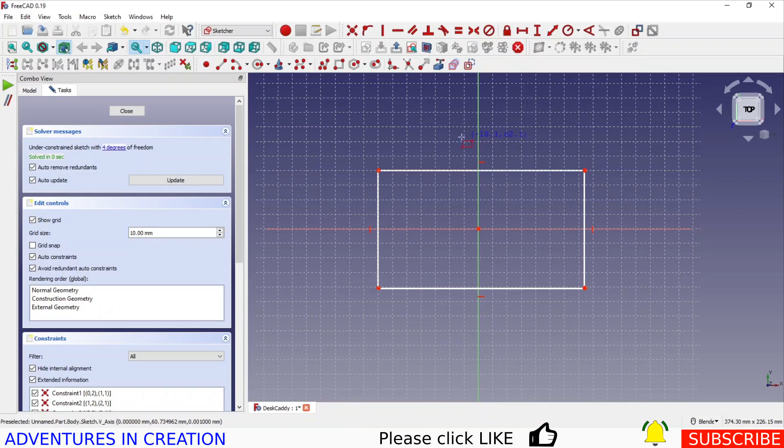So I know the base of it is just going to look like this. It's going to have a couple of holes, dowel holes in it, just to line everything up. And there are going to be some radii in the corners, just to give it some shape.

So this would be the base, and it isn't going to have any holes in it, of course, other than these dowel holes. So that's about the size of it.

And I'm going to constrain it quickly. I am going to use this point and this point to my center, just make that symmetrical. I know that these radii need to be 20.

And I know that this, and this, are all going to be equal.

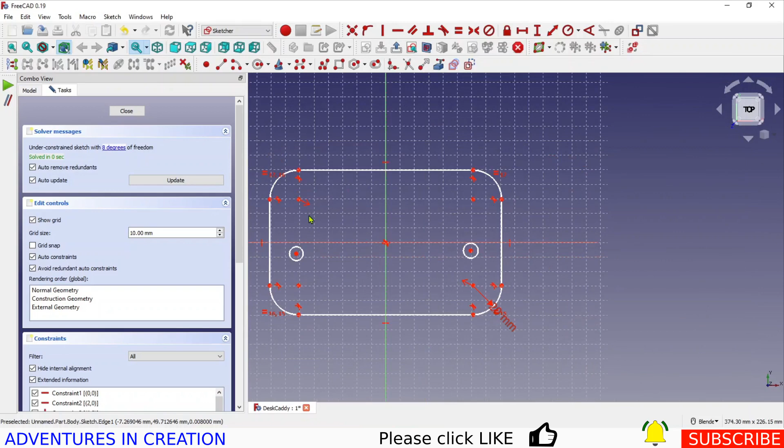And then finally my dimensions, I'm going to dimension this guy across here. He's going to be 230 millimeters.

And I'm going to dimension this way, and he's going to be 130 millimeters.

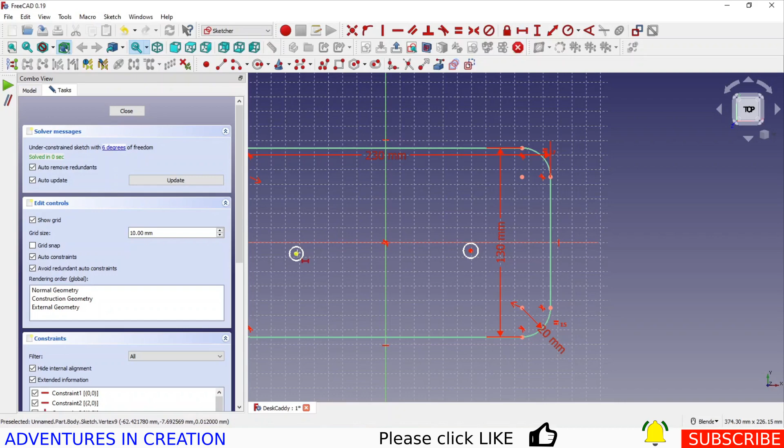And then I know I actually already figured out that these holes are going to be 220 millimeters on centers. And of course, they're going to be symmetrical around this line.

And I already figured out that the height of them needs to be 7 millimeters from the center.

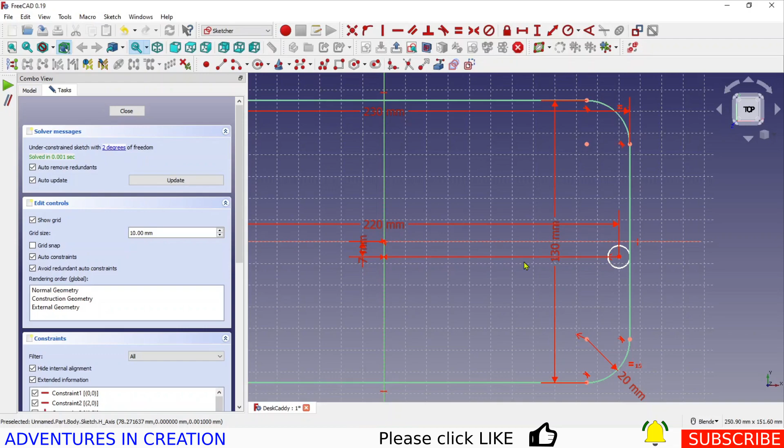And the diameter needs to be 6.4. That's the size of my dowel pins.

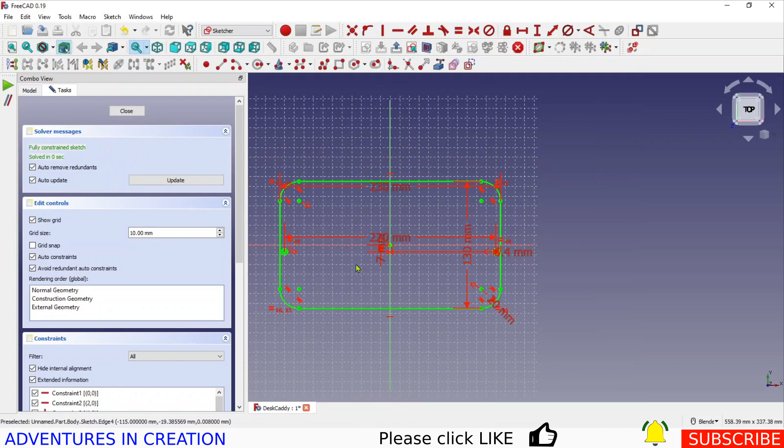And this one and this one are going to be equal. And that's basically it. So if I close that and pad it, all my pads are going to be 4 millimeters thick.

Because that's how thick my plywood is. And just bring that to the center. And there you can see the base shape.

And it's that simple. Okay, the next part, and I'm actually going to create a new part. So because I'm going to CNC route it, you want to have them separate parts so you can put the jobs in those parts. So I'm going to create a new part with a new body.

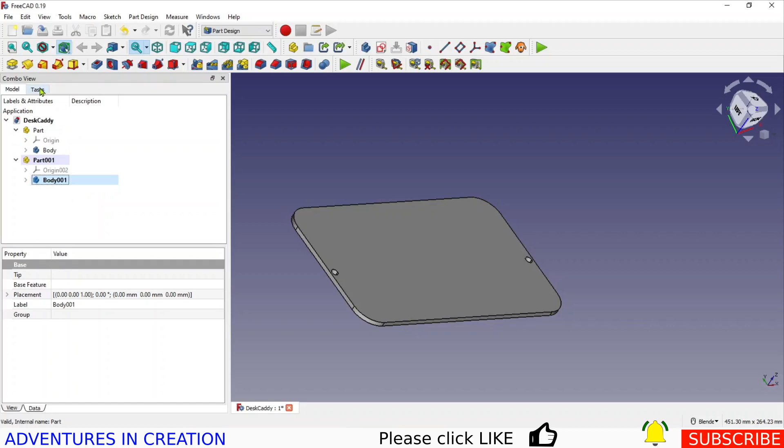And I'm going to make this the active body, and create a sketch. Apparently I didn't make it the active body. Now it's the active body. Create a sketch, XY plane.

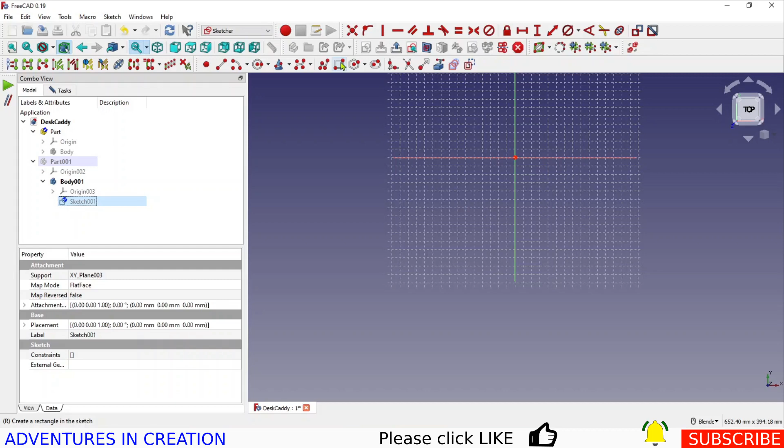And it's going to be the same outside shape as this. So I'm actually going to turn that off for a minute. Back to the sketch, we're just basically going to sketch the same outside shape.

So I'm not taking the time to show you all the details on this outside shape. I'm just going to put in my radii between there, there, there, and there. So if you want to see more details on just the sketching part, look at some of my other videos. Again, this video is going to concentrate more on creating the paths.

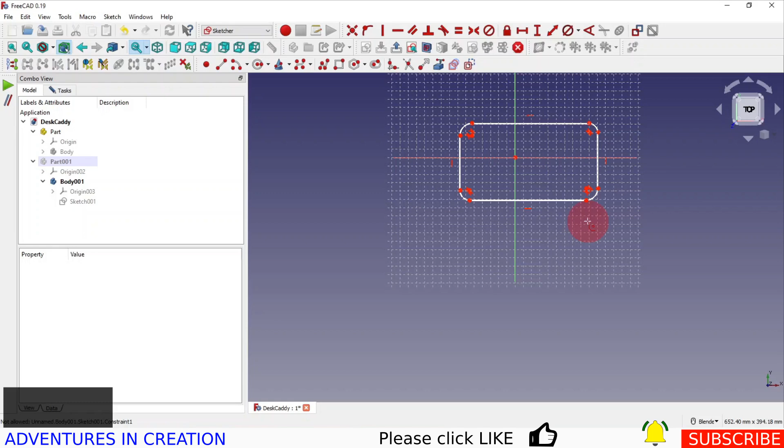I will create an assembly. I'm going to show you what it looks like in assembly. So we'll do some Assembly4 on here just quick, just to show you how that works.

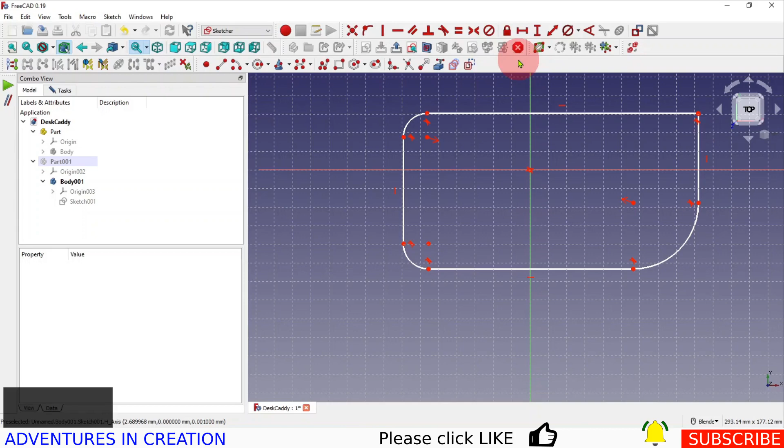So as far as constraining, I'm going to do the same thing. I'm going to constrain this point and this point around this point, and I'm going to just dimension those radii.

We know they were 20. There we go. So we're going to go that guy, and that guy, so they're all equal.

And we're going to put our holes in here. It doesn't matter where you put them as long as you don't put them directly on this line, because it will create a constraint and lock them to that line. You don't want to do that.

So we know that the dimension from there to there is 7 mil, just the same as we did. So those are our alignment holes. So it's important that they're in the same place, because that's going to line everything up.

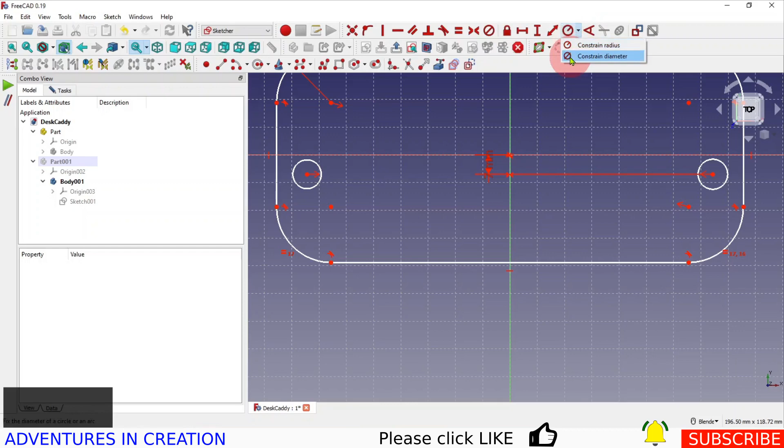And we know that's a symmetrical constraint. We know dimensionally we want those to be 6.4, so the dowel should go in there fairly easily.

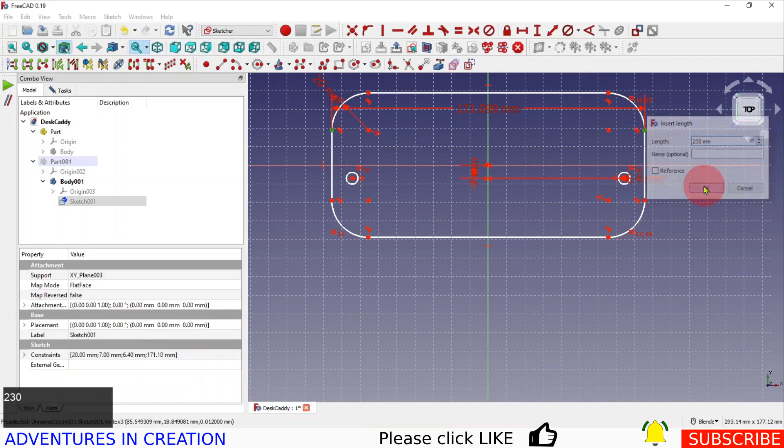We're going to make those equal. So that's that part, and the outside dimension for that we know is 230, and the outside dimension for that we know is 130.

And we also know this dimension between these two holes is 220.

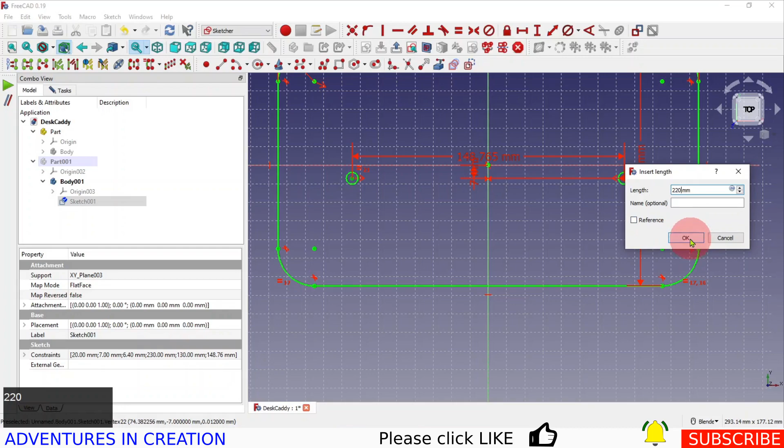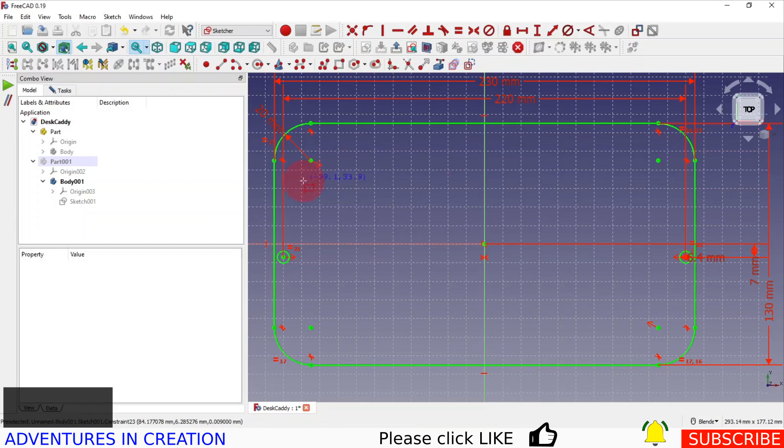Now it's just the cutouts that we want to put in. I'm just going to move some of these dimensions out of the way. We want to make the cutout for pieces to sit in the actual tray that's going to hold all the parts. So what I want is a square or a rectangle that goes in here, and a smaller rectangle that goes in here.

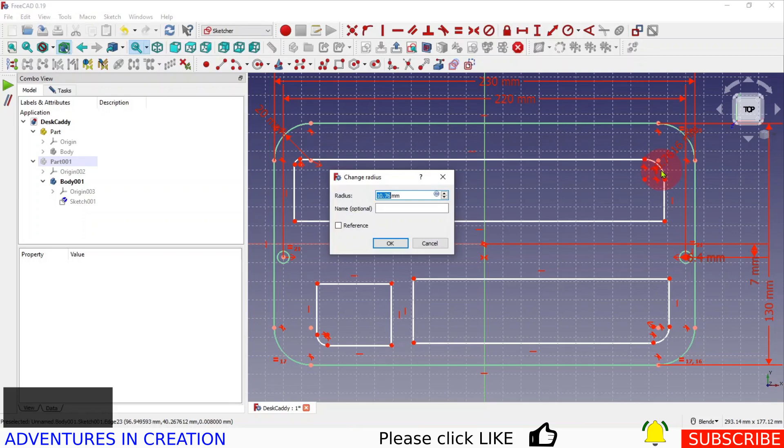I'm just being careful not to actually place it on any point so it doesn't constrain onto those points. Then what I'm going to do is add some radii up here, down here, down here. I'm going to constrain those radii to be 8, and make that one, and that one, and that one, and that one all equal.

Then I know I want this, and I'm going to leave these as square corners. Of course, we're going to cut them with a round cutter, so they will have a slight radius on them, but I'm not going to show that. It's not necessary. So I'm going to make this guy

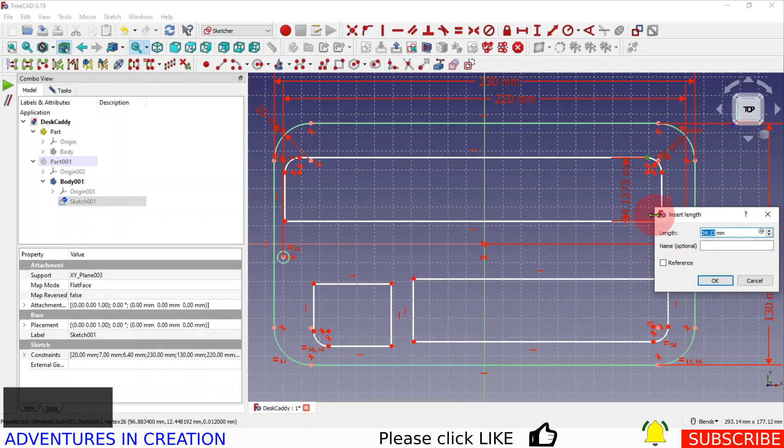60. So that's how big I want that. And I want the outside dimension for that to be 220.

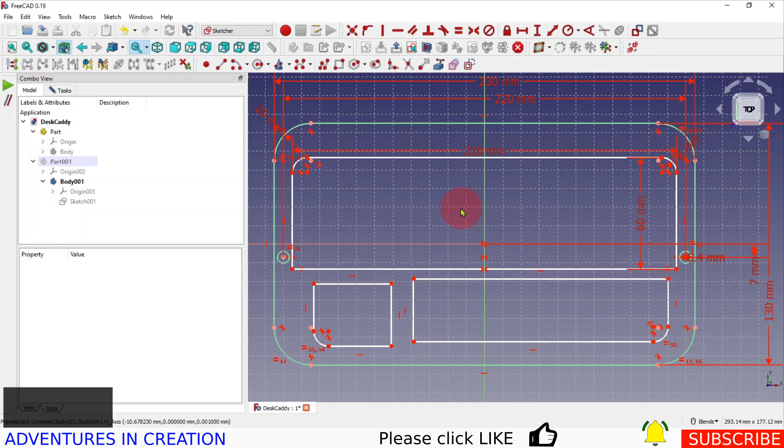And I want that guy to be symmetrical in the middle. So I'm going to go with this point, this point. I still have the dimension line on. This point, and this guy, and say symmetrical. Sometimes with the red dot on there, I can't see that the dimension is still showing up on my cursor, so I forget to right click it, so that's why I just had to redo that.

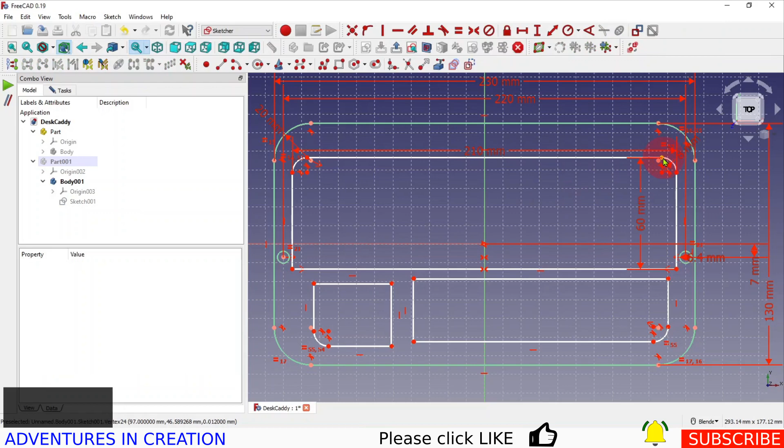What we're going to do then is we are going to position this. We want it to be positioned so that the dimension between that line and that line, that's actually the wrong one, hold on, that one and that one is 10. So I'll pull it up, and that's where we want it to sit.

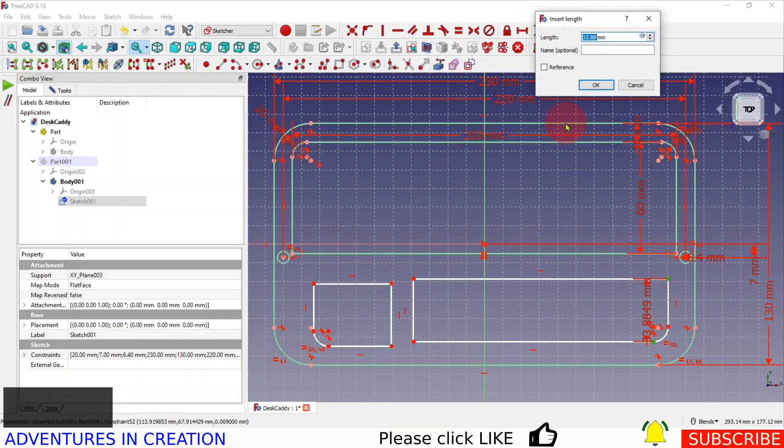And then for this guy, we're going to dimension him. He's going to be 56. That's good. And just look in to make sure I got my dimensions right.

Oh, I want to align this guy and this guy. So I'll just hit those with a vertical alignment. And I'm going to align this one and this one with a vertical alignment. And I'm going to make a gap between this one and this one. I'm going to make that gap 8. And I am going to align this one and this one horizontally. I'm actually going to dimension that gap between them because I want there to be a gap between them.

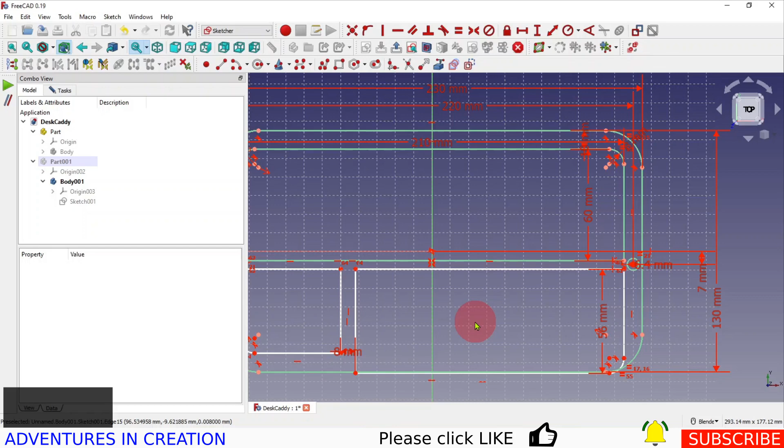I'm just looking at my sketch, and I think I may have one of the dimensions here set up incorrectly. I think that 10 dimension. Let's see if we can find that guy. There he is there. I can pull him out here. I think he should only be 8. There we go. That looks better.

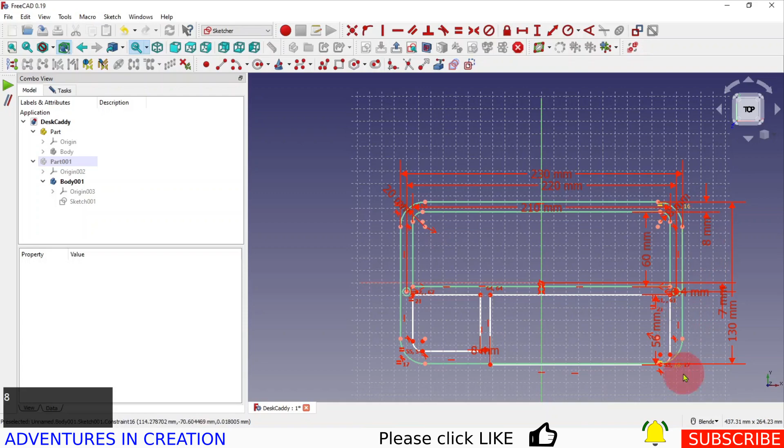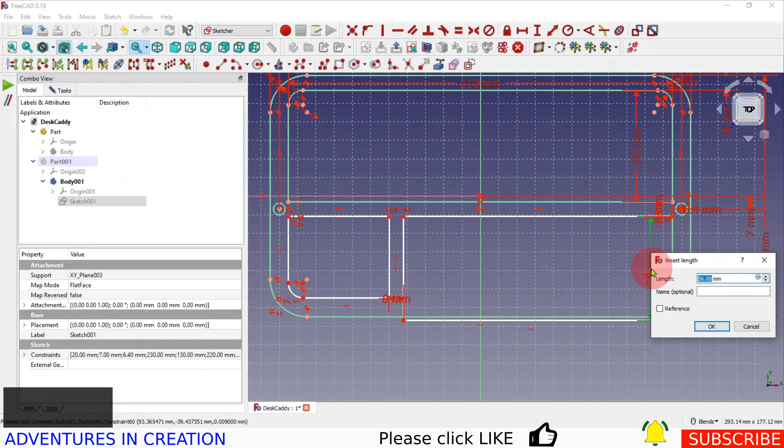And I think my 56 dimension might be miscalculated too. We want to go from here to here. I'm going to go with that as 8. Just going to push that down, and then what I actually want is not for that to be 56. It should be 46 is that dimension there. Miscalculated by 10. There we go.

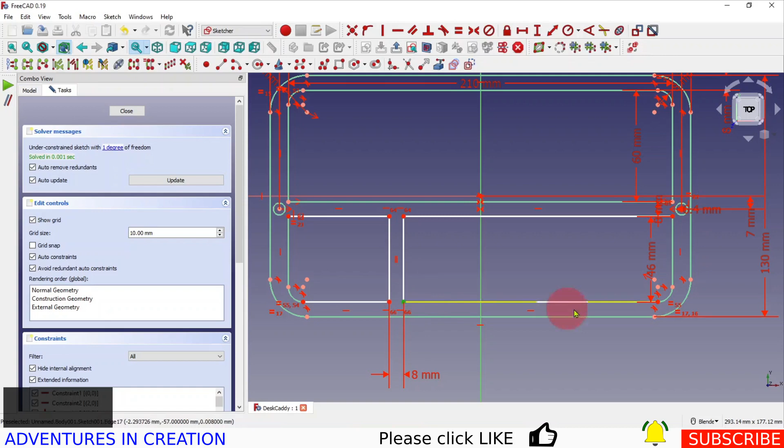And then that guy and that guy, they should be horizontal. It's about time we did a save here because we don't want to lose anything. And what else do we need to dimension? This one, this one, and this one.

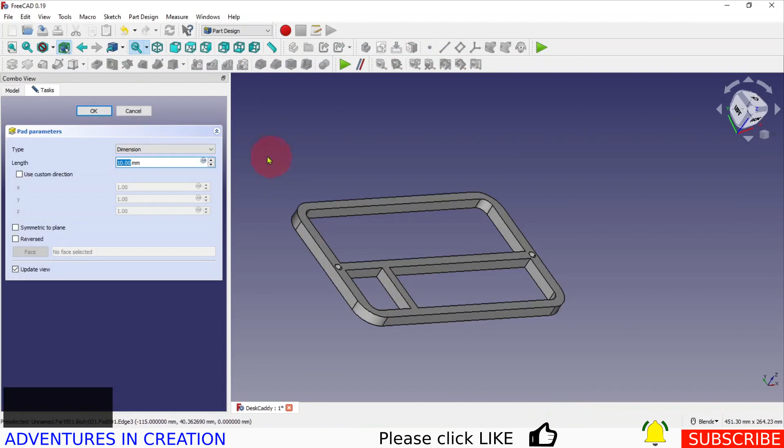We're going to dimension that, and it's going to be 160. There. And that is my tray. So I'm going to close that. So we're going to pad this one 4 millimeters, the same.

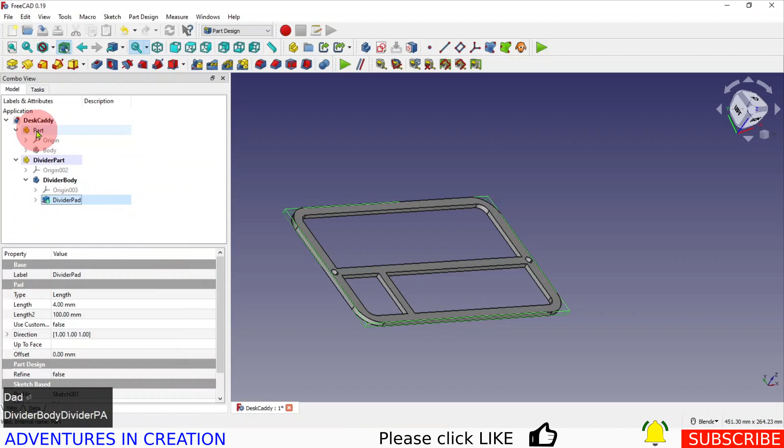And then we're going to go back to our tree. And now we're just going to give these some descriptive names. So I'm just going to rename that. I'm going to call it my divider part, my divider body. You can call them whatever you want, doesn't matter. And I'm going to call this my divider pad. I generally leave the pad body part pieces in the names, just so you make sure you know what's what.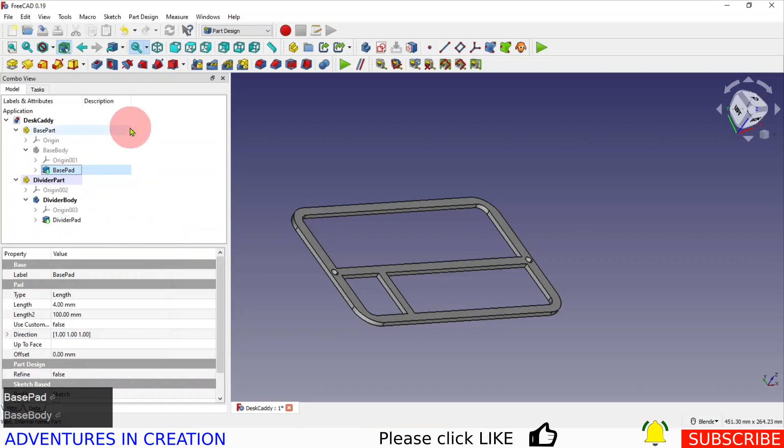And this one I'm going to call my base part. And this one I'm going to call my base body. And finally, I'm going to call this my base pad. Okay, and so that is my two parts.

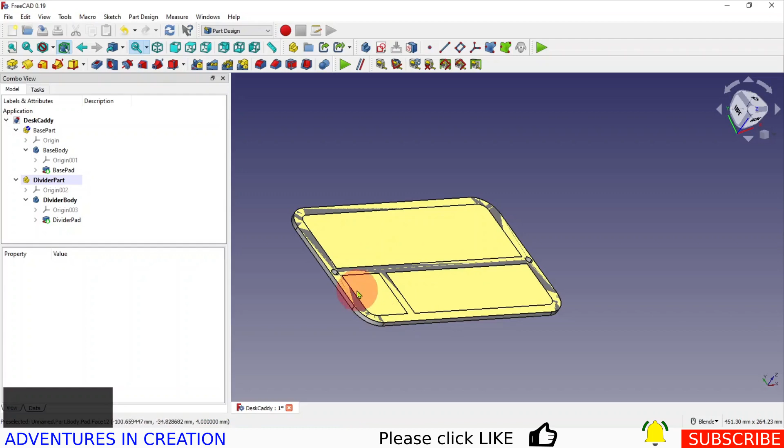And I'm going to use these two parts. I'm going to create multiples of them. So I think from what I've seen so far, I'm just going to create one base. And then I'm going to create 7 of these dividers. And what we're going to do now is we are going to close this guy up here. And we're going to save it. And then we're going to create a new assembly just so that we can see what it looks like.

So we're going to go into Assembly4 quickly. In Assembly4, we have the Desk Caddy assembly and the Desk Caddy basic models. And what we're going to do is we're going to apply some LCSs to these guys. So we're going to add an LCS. We're going to call this LCS front.

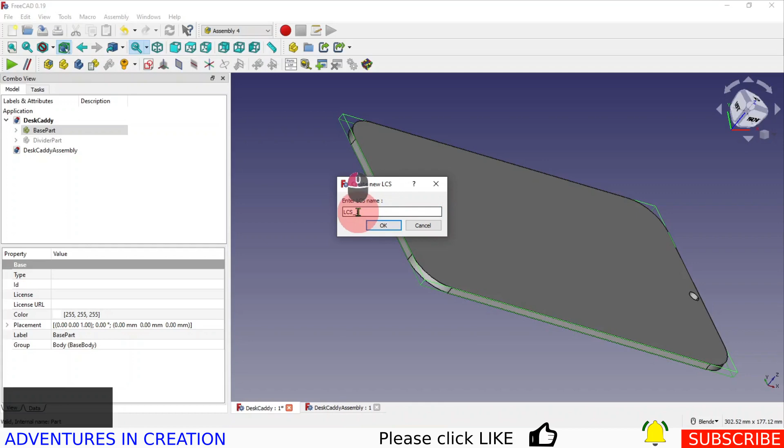And we're just going to put it on this hole here. These are our alignment holes, so we want to put it on the hole. Say it's concentric—it's important that you click that concentric. You'll see the LCS is right there.

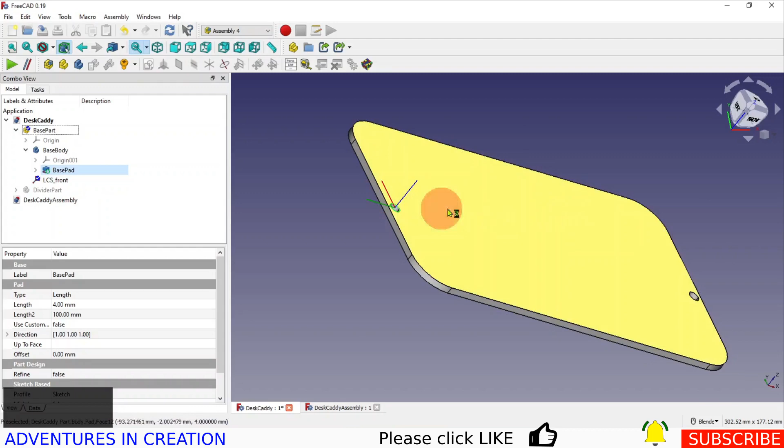Apply, say OK, and now we have the front part of this base. And we're only going to have one base, so we only need one LCS for that. So close that, turn that off, turn the divider part on. I'm going to create an LCS for that, and I'm going to call it LCS front.

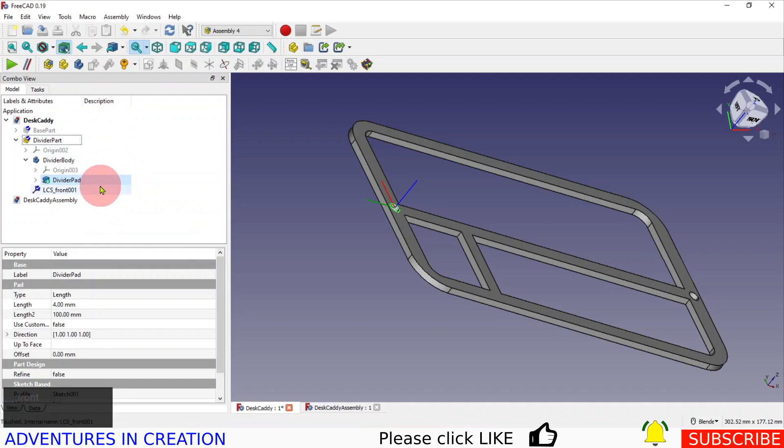I'm going to apply it to that same circle on the front edge and make it concentric. Say apply, say OK. And then we're going to do one more. So we're going to go to the part, add another one, and call this back.

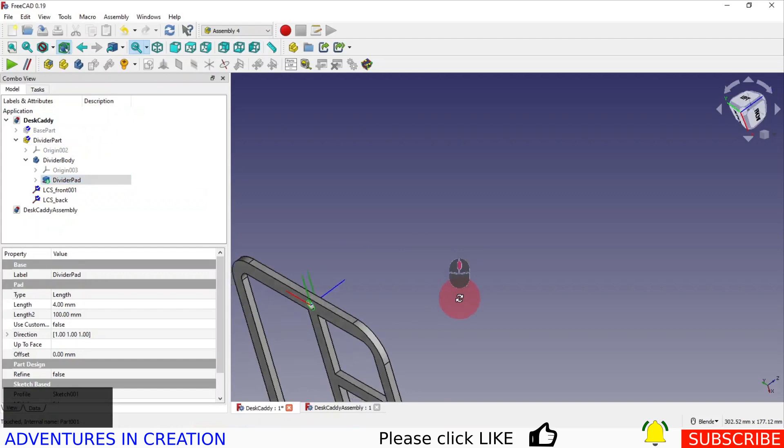Now, because we want them to stack up on top of each other, we're going to put this one on the back here. Concentric again, apply, say OK. And if you look, now we have one LCS. If I show you close up, we have one LCS sticking up there and one back here—one on the front and one on the back. So that's all we need to do for that.

We are going to turn that guy off, close that, and go into our Desk Caddy assembly. Ignore any messages, errors, whatever. I'm going to start a new model, and then I'm going to link in my models.

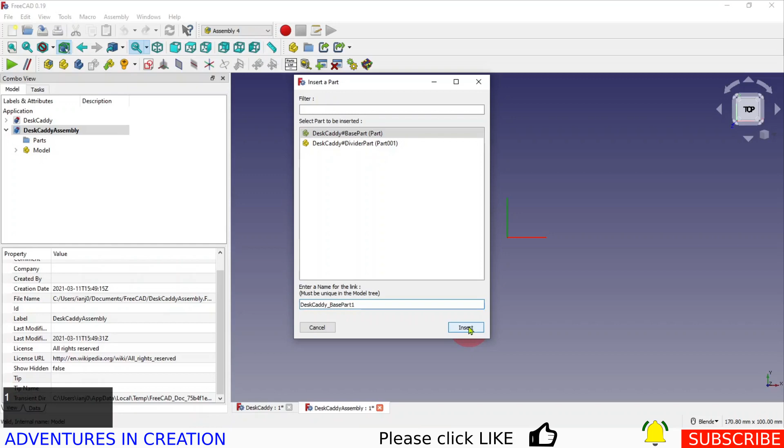So I'm going to hit link, Desk Caddy part. I'm just going to call it part 1 in case I wanted to put a second part in, but I'm just going to call it part 1. And take the front of that, put it into the parent assembly onto its origin, and just because I wanted it sideways, I'm going to rotate it through the Z as it comes in and say OK.

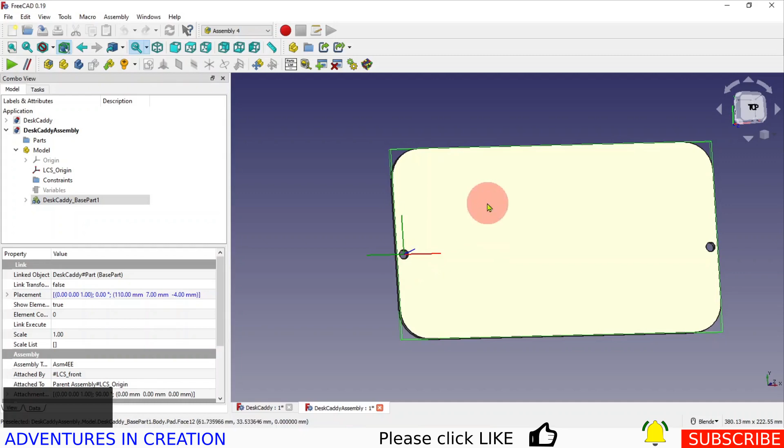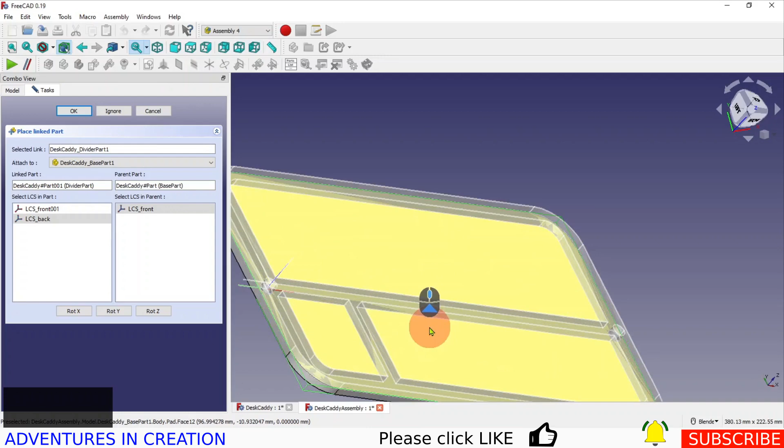So now I have in my assembly just that base, and now I want to add a divider. So we're going to go back to our assembly and link in a divider part. I'm going to call that part 1, say insert. The back of part 1 is going to go to the front of the base part. So if you look here, you'll see it's actually going to come in on top of it, and it's exactly where we want it.

And then we go here, we're going to link in another divider part. We're going to call this 2, insert. And we're going to say the back of that one is going to connect to the front of the one above it. So there, say OK, and you get the picture here.

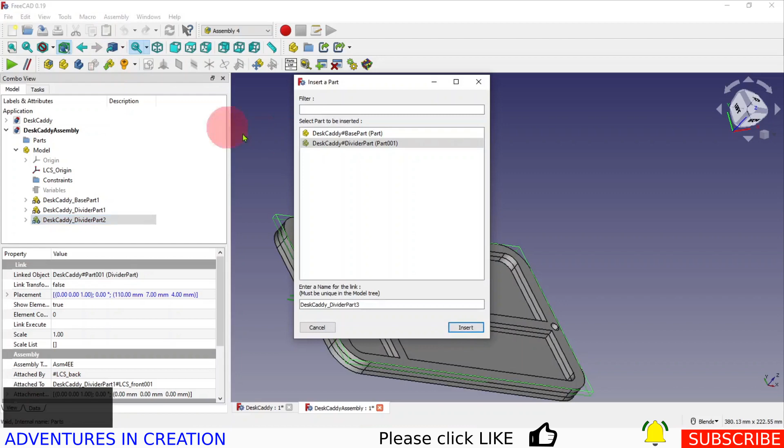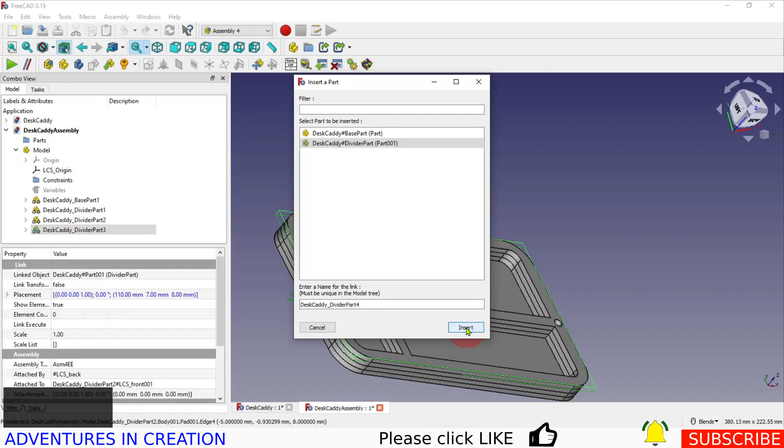We're going to just keep adding. So I'm going to add another one, call that 3, insert the back of that to the front of that, and one more. Right part, it's actually doing part 4 for me. Insert back of that, it's going to go to the front of that.

And so how many do I have? Four, so I want five. Insert, back to the front. Say okay, and then six. Insert, back to the front. Say okay. Last one, insert part 7, back to the front, and we are all good.

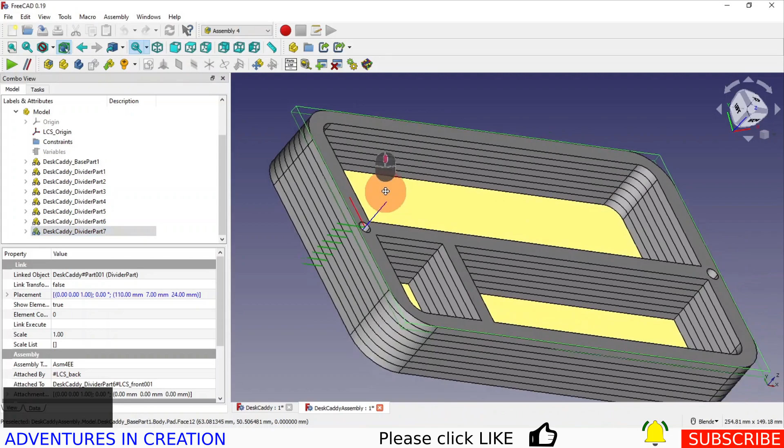And so this is what our assembly is going to look like, and we should be able to see that the holes are all perfectly lined up, all the parts are lined up. And now out of these 4mm pieces of scrap wood, I'll have a little tray that I can put my stuff in, which is basically what I'm trying to do here.

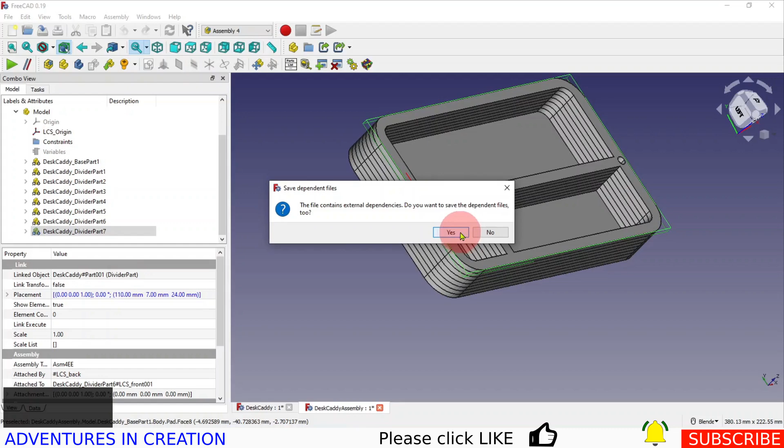So that is the assembly. Then I'm just going to save that, and I'm going to save my Desk Caddy file. Notice the way that we linked them, everything's still in this file now.

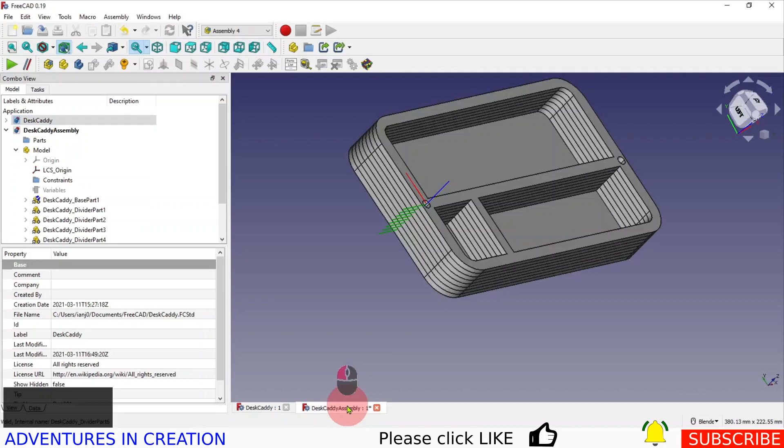So when you link them that way, everything is a link. You can see, if you look closely here, it's a link to those parts, and those parts are automatically put in the model that way. So there's our assembly, all finished. I don't need any animation because I'm not going to animate this assembly.

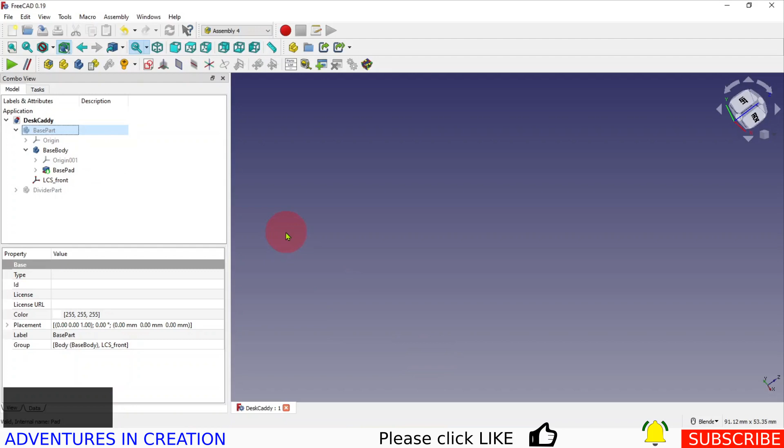Now we're going to go on and do our path work, and we're going to do that in Desk Caddy. So what I'm going to do is close my assembly, and that is all done. Now I'm going to create the path information in my original model. This should be straightforward—I'm going to do the base body first. So essentially, we're going to go into this base part and drop into our path workbench.

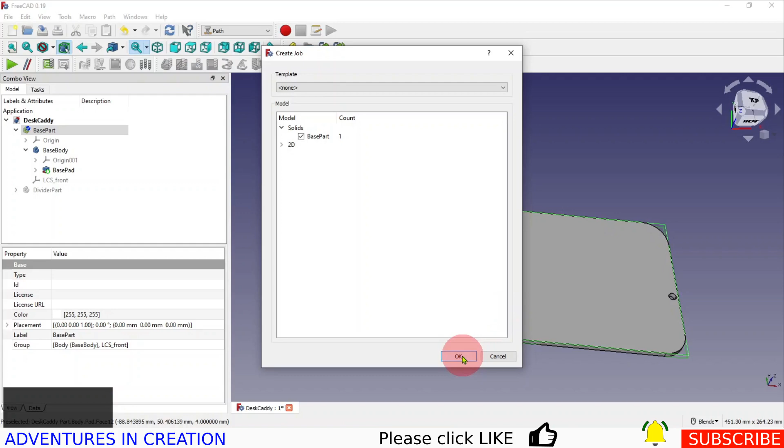We're going to create a new path, and our base part is going to be in there. We'll say okay, and let's give it a second while it sets everything up.

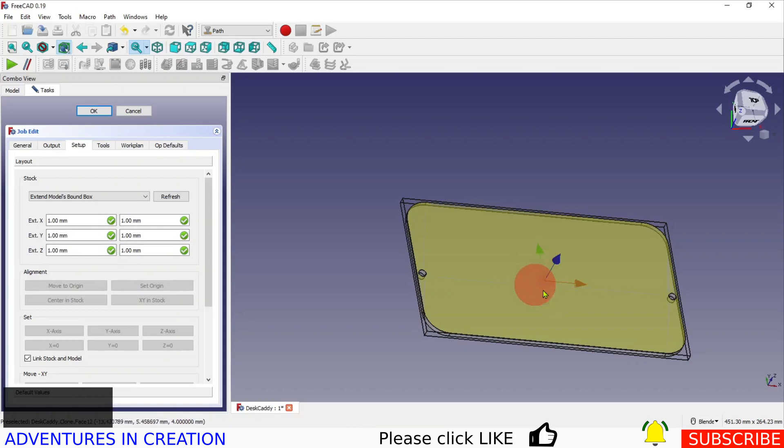There we go. I'm going to leave my LCS in the middle. So when I start my job, I'll have it in my set block here. I'm going to move to the middle of where I want this to cut out, so that's where we're going to start from. I'm not going to extend my model's bounds, so I'll make all of those 0. I don't need any complications on there.

A couple of things we can do from the start is we can add a tool. I'm just going to do all of this with a 1/4 inch milling cutter.

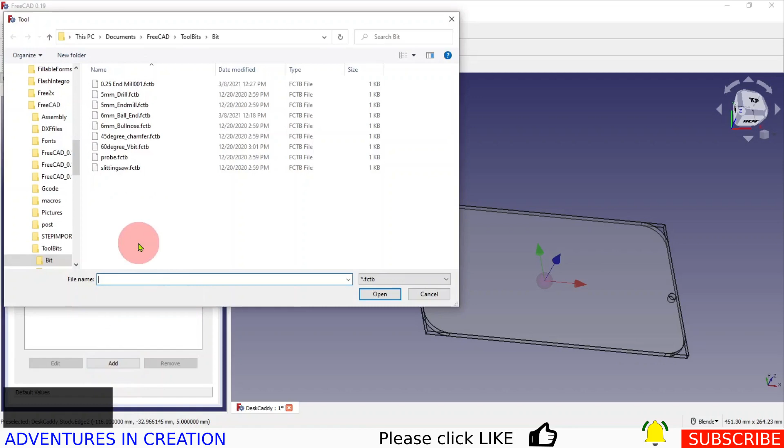So this is my 1/4 inch cutter. I'm going to get rid of the default tool so we don't have to do any selection there. And then in general, we can see it has the base part selected.

That's all good. For my output, I'm using my MPCNC post processor. That's the one I modified from the Grbl post processor to work with my particular router. It works with the Marlin board, and that's what we're using there.

On this guy, everything looks good. On here, we look good. On our work plan, on our defaults, everything looks good. So the only thing I want to set is my start depth. It's under the setup tab, right at the bottom, it says defaults. And I'm going to set my start depth to be 0.

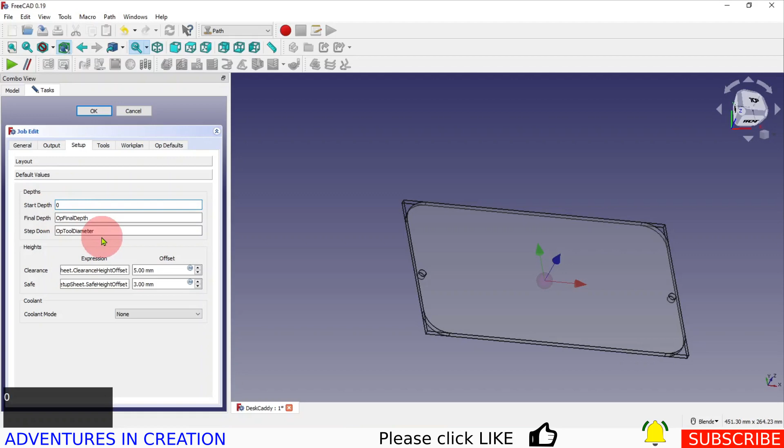My final depth is going to be -4, because that's how thick my material is. And my step down is going to be 4, because I want it to do it in one cut. My clearance and everything's good, and I don't use any coolant. So that's everything good now.

In the job, we only have our tool. We can set up an operation. So what we're going to do is select this — I'm going to use this guy up here to select the whole outside edge.

And we can cut the outside edge. It's going to be our 1/4 mill. We want it to go outside, not inside, in this case. Our heights are set at 3 and 5. Our depths are set at — the start depth is set incorrectly. It's starting at 4 and ending at 0.

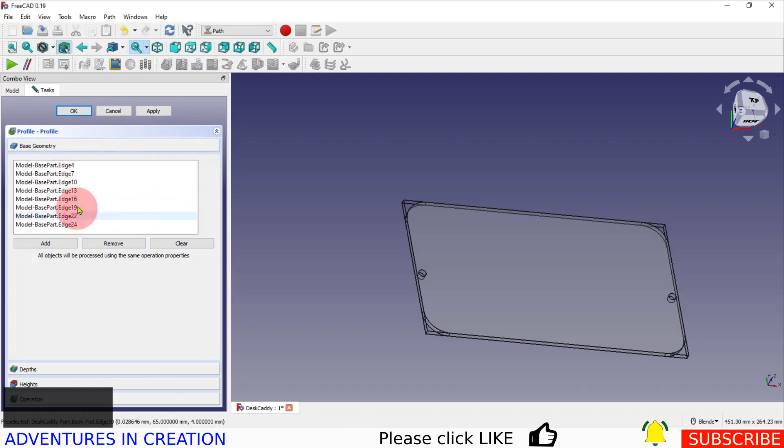Now I noticed it comes up this way, but if you just go in here and say OK, it'll go to those defaults I set, which was 0, -4, with a step down of 4. So that's all good. There's my geometry, it says the whole outside. I'm going to apply that. You can see it's actually cutting the outside, and that's all good.

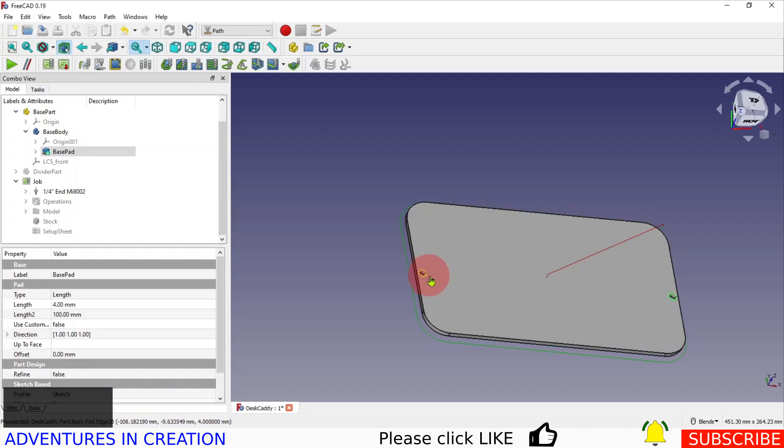Then the next part I want to do is cut this and this. Didn't get the right part there — let me just do that again. So I'm going to cut this.

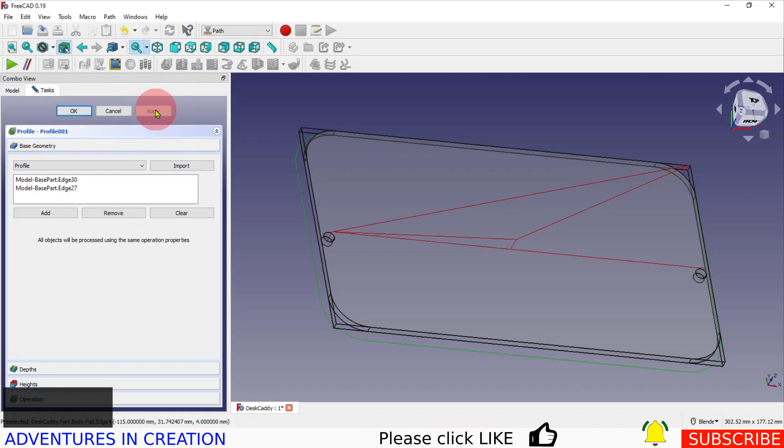And hold down Control and click that one. Now I should have them both selected. I'm going to do the same thing — it's just going to be a profile, and this time it's inside. And my heights, my depths, it can do that same trick. So I just touch this, click OK, it goes to my defaults, say Apply, and say OK.

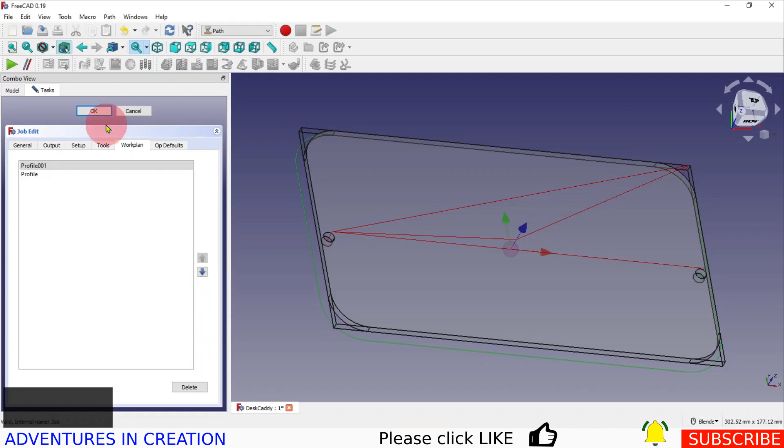Now, one thing you might notice is that in my operations, I'm doing this outside cut first, which will release that piece, and then I need to cut those holes. That's really the wrong way around. I want to switch those around, so I go into my job, into my Workplan, go to that profile 1, which is the second profile, click up, say OK, and now it's going to do these holes first, and then it'll do this outside edge.

So on the outside edge, I also want to add the tag dress up, and there are the tags — there are 4 of them. I think the default is fine, but you can have more if you want. You can add more, you can add less, individually turn them on and off, and change the width. I'm going to do a 3 mil tab, 1.5 millimeter high.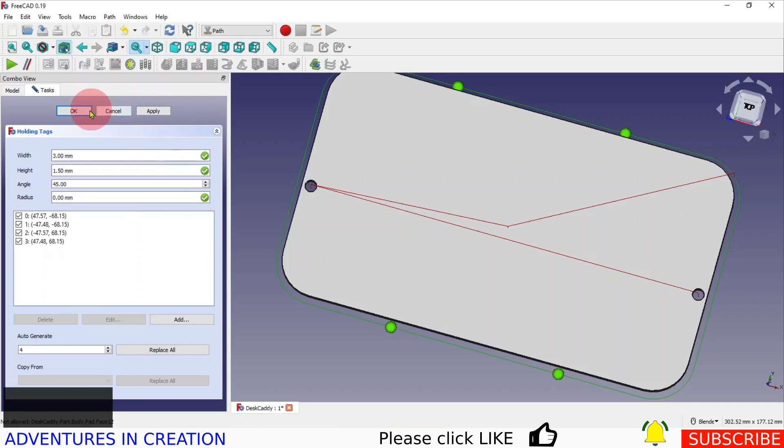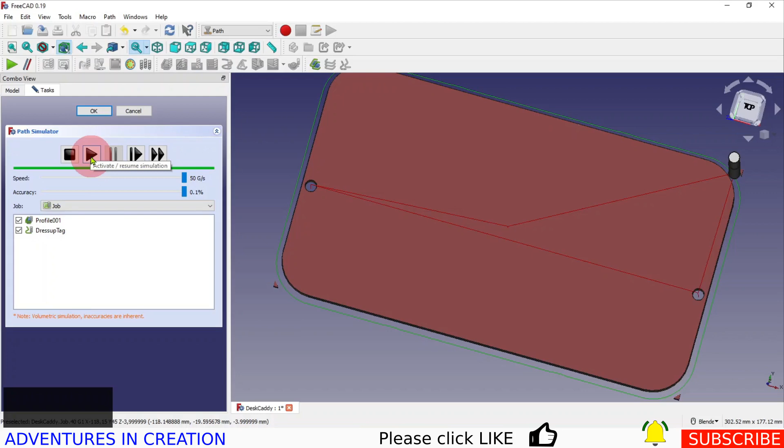That looks like it'll work perfectly fine for this part. I'm going to save it before I do this, but I can do a simulation of this part and run it. You should see it go make the holes, then go do the outside, and it's done. It's going to be in one cut because it's only 4 millimeters deep, and it's a 6.3 millimeter cutter, so we should have no problem cutting that in one go. So that's essentially the bottom part.

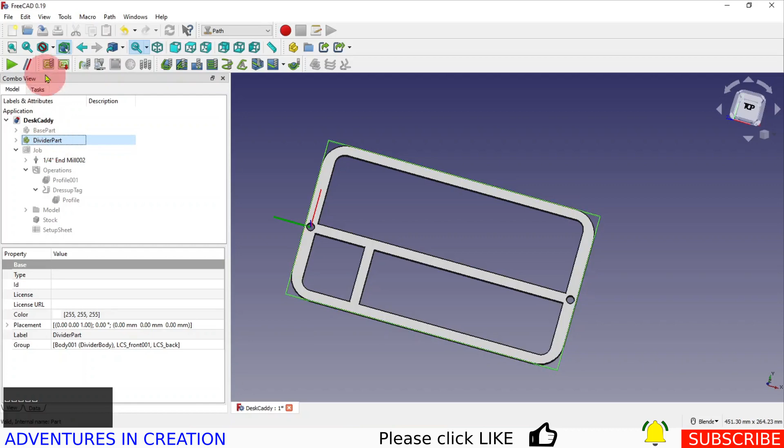Now I'm going to turn off that part. I'm going to turn off this job, turn off everything I can, so I make a nice clean go of it. And I'm going to turn on my divider part, and we are going to select that divider part and create a new job. You see it only has the divider part in it.

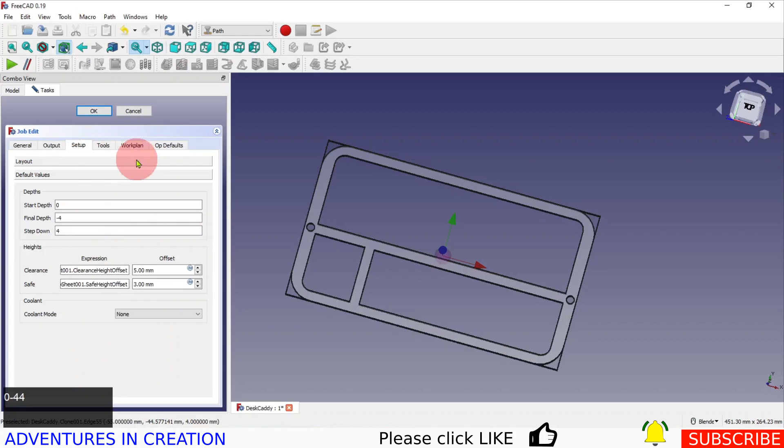We say OK, and once again I'm not going to add any extra material. I'm going to change up my tool, get rid of the default tool, and go to my setup, my defaults. It's hard to see there because I have this gray box in the way, but there's a default values button here. So I click that, and I'm going to make that 0, -4, and 4. Everything else looks great. It's okay.

And then we are in job 1, so we're going to open that guy, and here we go. We're going to add an operation. That one works. So I'm going to actually rename these guys. I'm going to call this holes, and I'm going to rename this one to large cut.

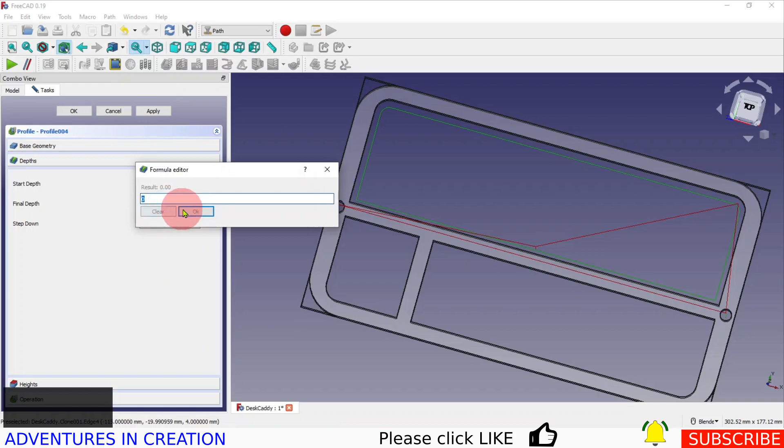I'm going to select this one, do the same thing. So I am breaking it up into smaller pieces because it gave it a headache. I don't like that. Same thing again, apply. I'm going to call this one medium cut.

Select this one, use this little guy again, hit that, job 1. I'm going to say depth. And that's all good, so I'm going to call that small cut.

And then finally we're going to select this outside edge, and job 1. Yeah, should be outside, not inside. Remember, the profile is going to be the outside. All these are the inside. The profile is the outside. So we just want to make sure we're cutting on the outside. And we'll rename that to outside cut.

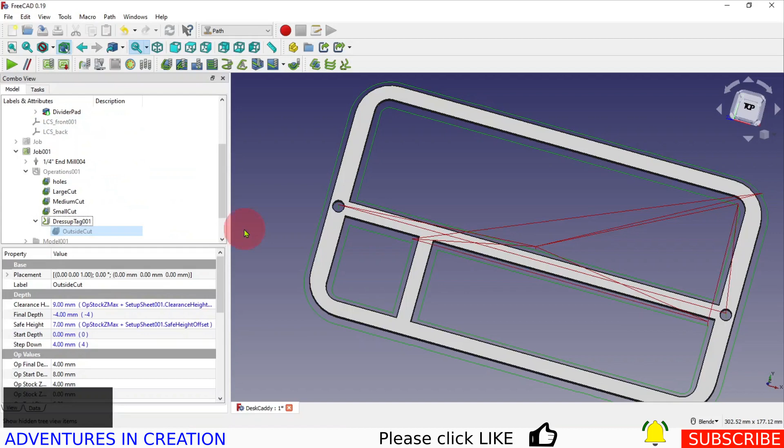That's all good, and the reason I renamed these is so I can tell which one I'm doing what with. So I'm going to select the outside cut. I'm going to put that same tag dress up on it. Looks good as well. Apply that, say OK. And now we have the cutout for these. So I'm just going to do one, then put another one in, put another one in, and do it 7 times, and then I'll have all my pieces.

So that is basically all the work we need to do to create our jobs. And then what we want to do is export those. So we're going to take job 1 out. Actually, let me just cancel that a second. I want to make sure I'm doing the right job that I'm putting out. So we're going to do job 1.

Going to rename that job. Base job. And rename that, we'll call that divider job. Those 2 jobs are done.

Now we're going to output that, and I have a G-code file here, and I'm going to call this Desk Caddy base job. There we go, .gcode. Save that.

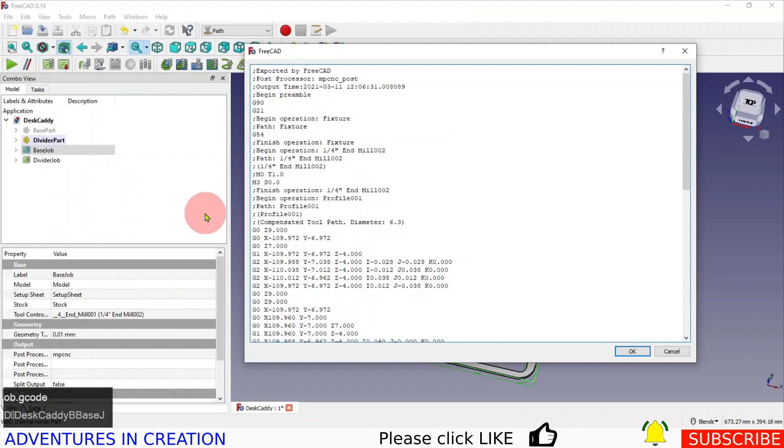Let's take a quick look. Profile 1, da da da da. And that's all it does.

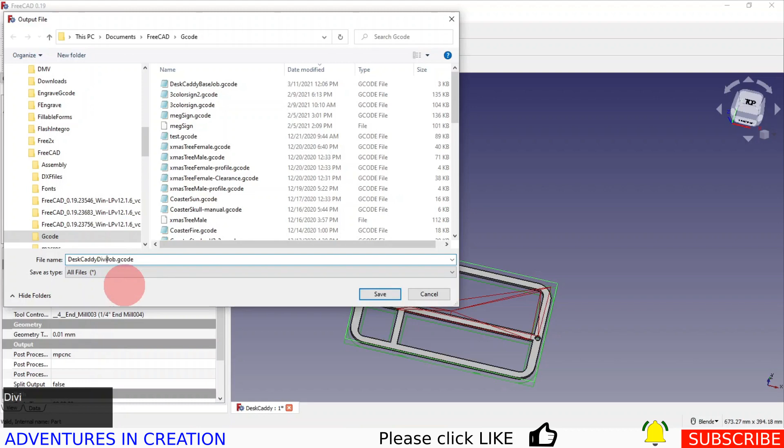That looks very good. And I'm going to take this one and output this one, and it's going to be called divider job. Save that. Let's take a quick look, make sure it makes sense.

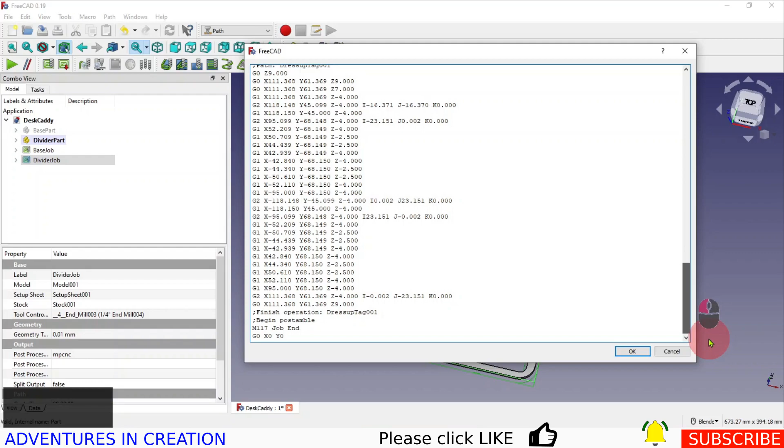So begin fixture, begin holes, and begin large cut, begin medium cut, begin small cut, and begin dress up tag. Boop. And there it is. So that all looks great.

So now I have two jobs to cut. I'm going to cut the base job and the divider job, and we'll do that on the router, and we'll catch you there.

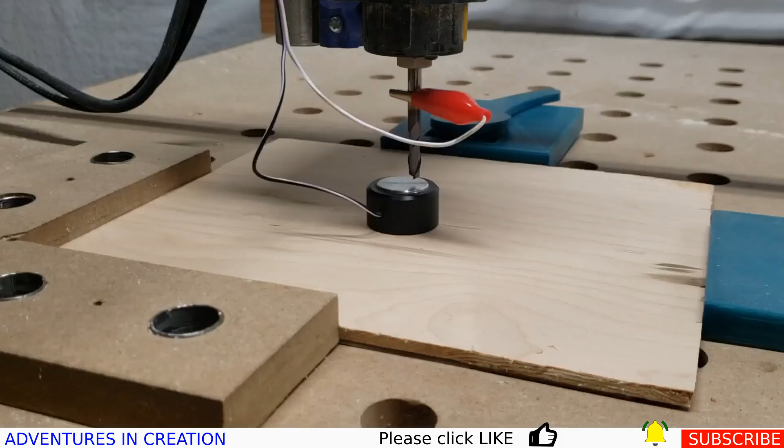So the first thing is to use my Z-stop. So what I do is use my Z-stop to set the height, and that's set up in my Octoprint so that it sets a point of 19.3 millimeters, which is the height of that stop, meaning I'm exactly at the top surface of the wood.

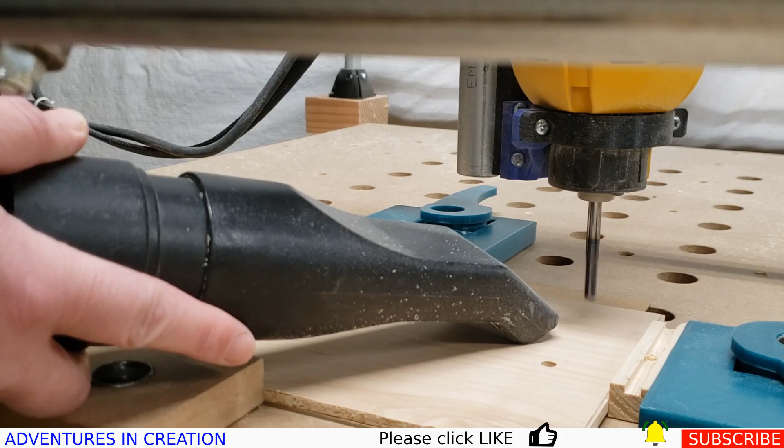This was the final cut for the base part, which is basically a solid piece, just an outline with the 2 alignment holes. I'll say the alignment holes work perfectly - the dowels went straight in, aligned everything, got everything lined up, and all the edges looked good.

Easy once it's all together, just give them a little sand to complete everything. But to be honest, all the parts I made were perfectly aligned with those holes lining them up, and the outside edges are all aligning. I was quite pleased with how it all turned out.

So a few pictures at the end here just to show you what it came out like. Obviously you can make any kind of box with this type of technique by layering pieces of wood.

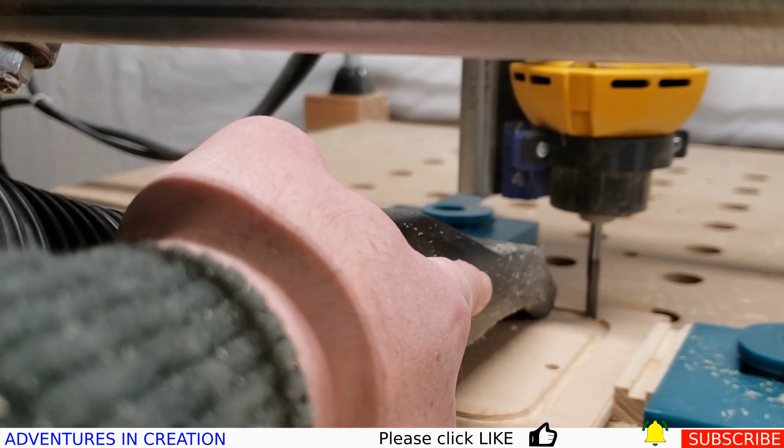It's a good way if you want to use different pieces of wood, different species of wood - so you can use some oak and some maple, layer them, and get that nice finish of having different species together, with different colors and different effects. One of the beauties of wood over just 3D printing it is you do get all that grain.

Now obviously with plywood the edges are not as pretty as a solid piece of wood, but as I said before, this plywood was just scrap that I wanted to use. It was at zero cost to me for the wood because I'd already scrapped it, and this worked out quite well because it just tidies up my desk nicely.

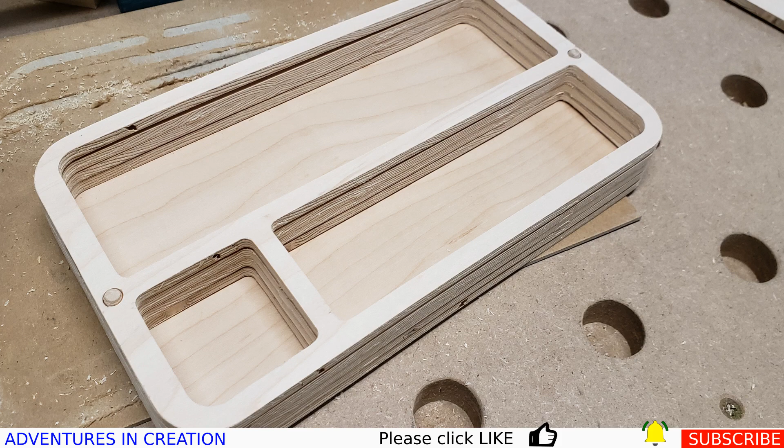Then finally, I think it came out pretty well. It looks exactly as I expected it to. I just need to glue it up and finish it off - put some stain on it and some lacquer, make it look the part, and it's all done. I just didn't want to wait to glue it all up before posting this video because I'm already running late with it.

As far as this video is concerned, if you've made it this far, you're a champion. I know it's a long one.